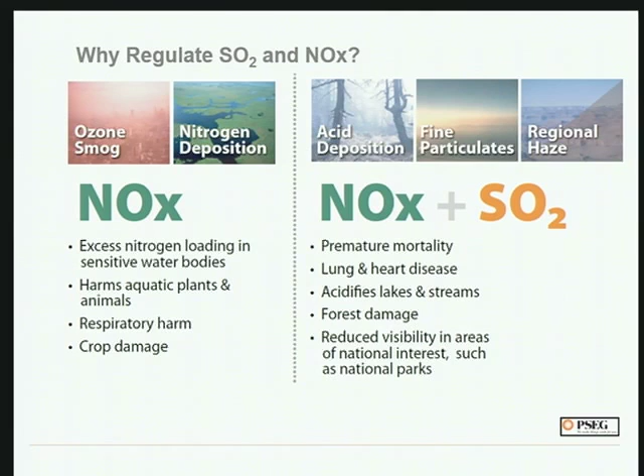Okay, so just to step back, the reason SO2 and NOx policy has so much uncertainty is because there's a lot of discretion, and it has to do with ambient air quality standards, achieving a certain concentration of ozone and PM in the atmosphere. So the focus naturally is less on one unit's individual stack emissions and more about achieving wide ambient air quality standards. In that, there's inherent flexibility for the use of trading programs, as well as looking at regional modeling and interstate transport issues. It's interesting - rather than mercury and some of the hazardous air pollutants, which have more severe human health impacts, SO2 and NOx have a little bit of flexibility inherent in them. That provides some element of flexibility, but also introduces uncertainty into how EPA will ultimately go about regulating the emissions.

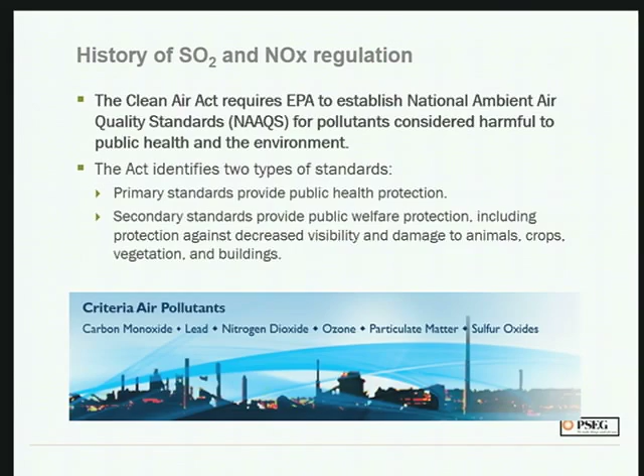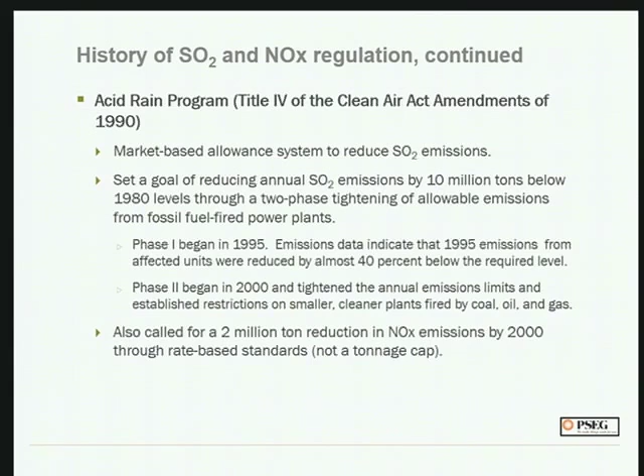So just to step back, the acid rain program - I think we're all well aware of that. It was the first emissions trading program, and it, in large degree, provides a framework for the 111D proposal on carbon. It was widely credited for achieving dramatic emissions reductions in a short period of time, cost effectively. So, love it or hate it, it has brought us to the point now where we're talking about carbon trading systems and even further tighter caps under SO2 and NOx. I'm not going to go into the details - these slides are here for you to read.

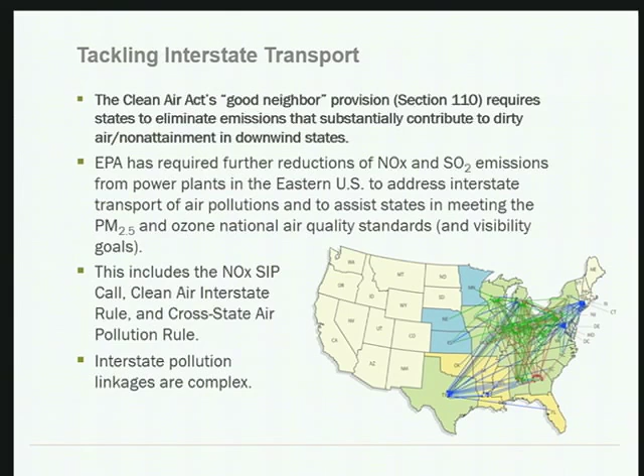The challenge with SO2 and NOx is, of course, interstate transport. It's very complex to understand the direct linkages between sources and receptors and how different units affect air quality among regions. We can spend days looking at EPA's modeling and all the nuances of the scientific understanding of how NOx and SO2 emissions get dispersed into the atmosphere. But I think it provides an interesting case study in how a regulator makes a determination as to an equitable distribution of costs and benefits across a region. Each state has its particular fuel mix and different cost structures with its generation fleet, yet there are regional air problems. It's a very interesting but difficult problem to solve: understanding where the emissions are affecting air quality, and how you distribute those costs and benefits.

And so that's the challenge. We're all living with it.

That's where we are. So in that effect, to realize emissions reductions and achieve the national ambient air quality standards, EPA has gone through a series of efforts, fits and starts, with the Clean Air Interstate Rule, CAIR, which the Bush administration first proposed. The D.C. Circuit, as we know, struck it down, then allowed it to remain in place while EPA developed an alternative. The courts determined that it was not stringent enough, so EPA was back to the drawing board. With that, they developed CSAPR, the proposal we all know about.

During that time, the allowance prices for SO2, which today range around $1, were for a large part in the early 1990s and 2000s around $100 to $200. They spiked to $400 to $500 per ton, went up to $1,600 per ton, and then collapsed in response to the D.C. Circuit ruling striking down CAIR, and now they've been fairly flat around $1 per ton. So a lot of variability, a lot of money at risk, which introduces complexity into long-term investment decision-making when you're banking on credits to make these retrofits.

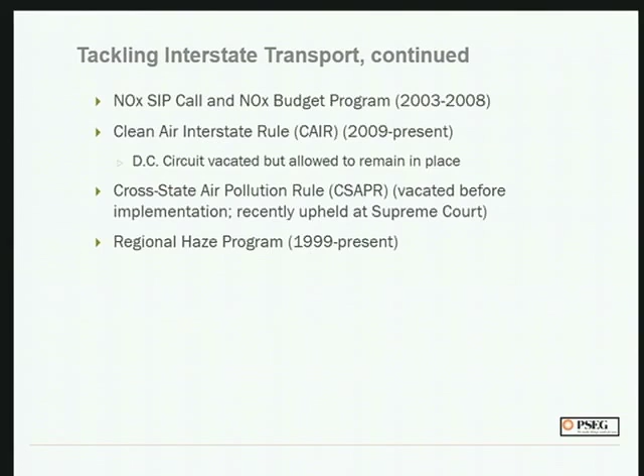And it's the same with NOx. The market has been very volatile in response to all these different regulatory proposals and Supreme Court decisions that have in turn struck down rules and then upheld certain provisions. So I think we're going to continue to see a volatile ride in the markets as the courts, EPA, and stakeholders figure out what eventually will be a program that everyone can live with.

I do want to point to the achievements that have been made. We see a dramatic reduction in SO2 and NOx emissions over the time period since 1980. The Clean Air Act was tasked with achieving reductions, and it largely succeeded. You see here a 67% reduction by 2012, while electricity generation went up.

Population has increased, GDP has increased, so this is a very good success story. A lot of people in this room, and others, have implemented back-end technology to reduce emissions, cost-effectively achieving reductions in a way that provided flexibility for some units to choose not to and pay for emissions credits, while other units made retrofits to comply.

So I think this is a good success story. I think it's important to note that we've made a lot of achievements.

We have a ways to go, but I also want to point your attention to vehicle miles traveled. It's a proxy for transport emissions from cars, trucks, and automobiles. We've become more mobile, moved out into the suburbs more, and done a lot more driving, and that in turn has increased a lot of the problem with ozone pollution. I'll touch upon that point at the end, but I think it's important to note that that's a problem that's there, and we continue to drive more while our electricity consumption has largely flattened out.

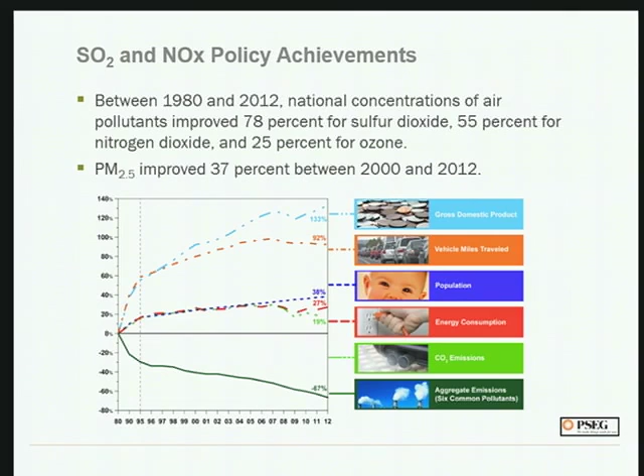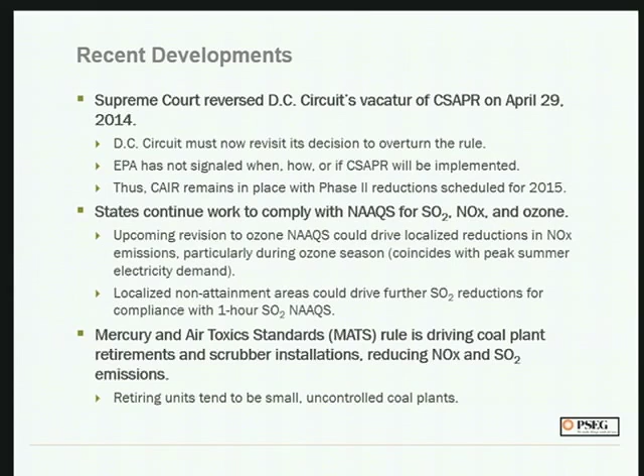Aside from certain areas where a 1-hour standard will challenge certain facilities, SO2 reductions have been or will be achieved. With NOx, though, it's a different standard, and I'll talk a little bit more about that in the future, but I just wanted to touch upon that right now.

So again, with the Supreme Court decision, the Supreme Court upheld EPA's authority to regulate and their discretion in determining neighboring states', or individual states', good neighbor responsibilities to lower their emissions to help other states achieve their air quality goals. And again, as I mentioned before, this has implications for 111D and the ability for EPA to go along with that plan.

And you know, while there will be challenges and a lot of court cases, and Quinn talked a lot about that yesterday, this has emboldened EPA and goes a long way to suggesting that a lot of their plan may be given discretion by the courts.

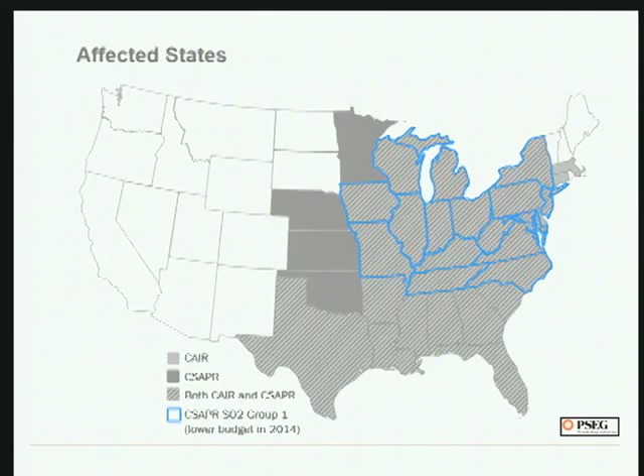I'll flip through the next two slides. The CSAPR regions are similar to CAIR with some extension.

Texas and Florida are key focal points because one thing the Supreme Court determined was that the threshold for requiring states to join these interstate transport regions should not be more significant than would bring them into the program. So Texas and Florida—EPA brought them under the program because their emissions contributed greater than 1% to the problem, but EPA was foreseeing reductions that would bring them greater than that obligation. And so the Supreme Court said EPA can't make them achieve reductions greater than their contribution.

So I think for Texas and Florida specifically, with the CSAPR rewrite, they may not need to comply as stringently as originally thought.

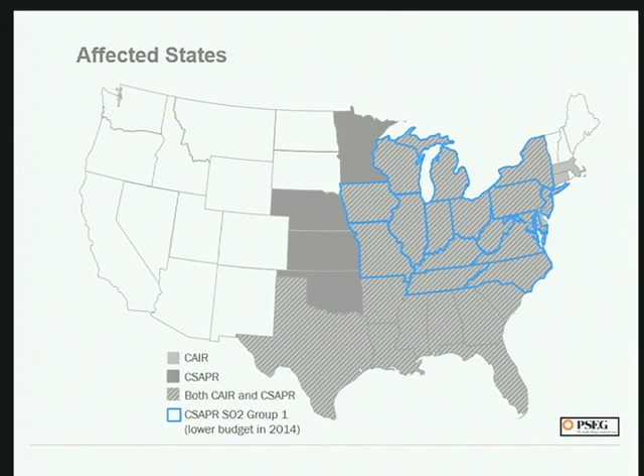So the focus right now, as far as CSAPR, is of course on a July 3rd briefing date with EPA. The DC Circuit has asked the parties to the litigation to provide briefs on how they think they should proceed. There were a lot of unanswered provisions or questions regarding challenges to the modeling approaches, and again, whether Texas and Florida should be included in the program, which the DC Circuit didn't originally address in their ruling that vacated the rule.

And so, as I speak here today, there's not a lot of certainty as to what will transpire in the future, but July 3rd will be a key date, and EPA has been close to the vest in indicating where they're thinking on CSAPR.

So it's an open guess as to what could happen, but in the meantime, CAIR remains in effect, and there are 2015 reductions scheduled to take effect that will, again, be less of a challenge for SO2, but for NOx will require some incremental reductions that may force some incremental installations of SCRs or SNCRs.

A critical question there is allowance prices, and whether or not states will move to impose a RACT requirement on individual units as their method to attain their ambient air quality standards. A lot of questions about what could transpire.

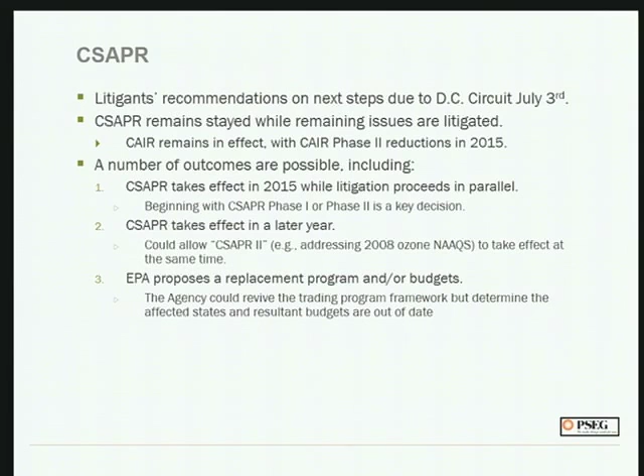And so that could take as much as 2 years to actually implement. So we could be talking implementation by January 2015 or as late as 2017. So a lot of uncertainty as to what course EPA will pursue. A lot of Wall Street analysts are speculating on that, and a lot of plants are in limbo, of course, complying with MATS. But this incremental requirement of an SCR or SNCR is a critical question that they will need to hold on and wait to see what EPA is thinking.

So with that, with SO2, there was a new 1 hour standard that EPA is working to implement. Again, SO2 reductions have occurred because of the changes in the industry and dispatch from coal to gas, as well as the controls that will be installed from MATS. SO2 as an overall cap looks to be in good shape. However, there are some local areas in non-attainment that will struggle to meet a new tighter 1 hour standard.

And this particularly, when you read Wall Street reports, they're very interested in learning which companies and which plants may be caught in that web. And the modeling is underway, and there's a lot of uncertainty and caution around what will happen there. So that's something to look to as far as EPA's solutions for that and whether or not that will be brought into their CSAPR rule.

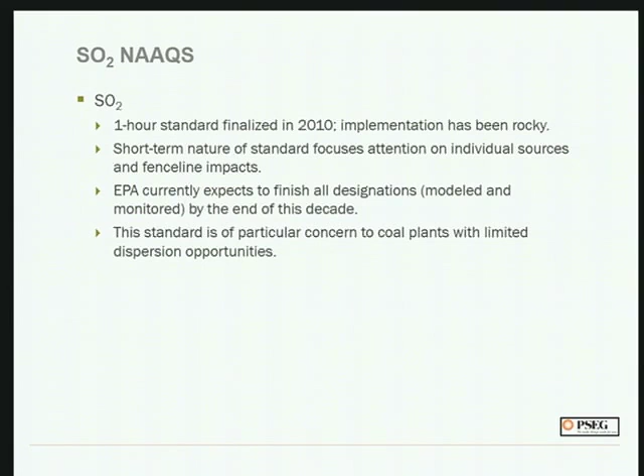As far as ozone, I mentioned that there's a tighter standard happening. The current standard that CSAPR was written to was 84 parts per billion to achieve. The 2008 standard is 75, and EPA is in the process of developing a new standard, which a recent court decision has required them to propose by December of 2014 and finalize by October of 2015.

So under this current administration, plans are for them to propose a new ambient air quality standard that could be between 60 and 70 parts per billion. The Clean Air Scientific Advisory Committee has recommended on the lower end of that, but the feasibility of achieving that standard may be called into question, and so we might see something towards more the upper end of the 60s.

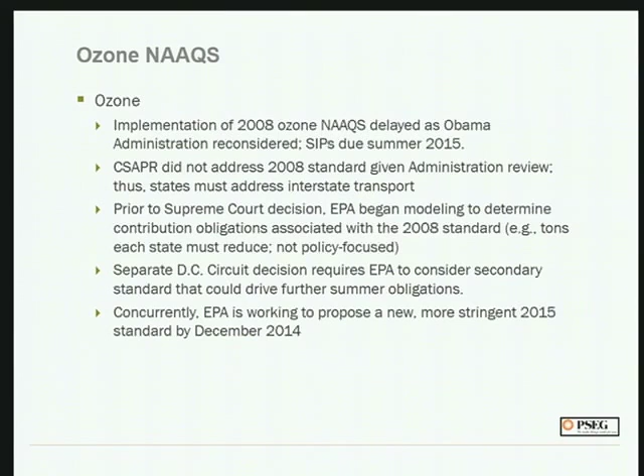But either way, that's a very strict standard that will be difficult for the industry to achieve, or will be costly, and that's something a lot of people have a lot of uncertainty about. Frankly, I don't think anyone can really realistically predict what will happen, but that's something that's key to watch. And I'll show a graph or an image to show this.

And so you look at the scale of reductions that might need to be achieved, and considering all the reductions that have and will continue to be made in the electric industry, you really scratch your head as to what can be achieved and at what cost. And I think that's the question that everyone's wrestling with. And that's the real, I think, bear in the room when you talk about what's next for SO2 and NOx.

Again, this is on a long horizon. The NAAQS will be finalized, the new standard would be finalized in October of '15. This is potentially under a transport rule or CSAPR Phase 3. So we're talking about implementation over 2019 to 2021. So it's far out there, but it's something to look forward to in the industry.

And it seems as if every plant will have to have at least an SNCR, if not an SCR, and so you really scratch your head as to see what costs the industry will have to bear to achieve that standard. Again, I want to ground us in where we are a little bit.

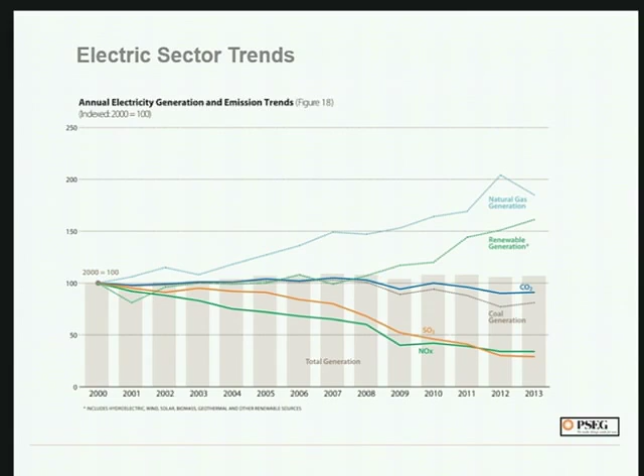I'll flip through here just to show you where the CSAPR reductions were in relation to the existing CAIR programs. You see our emissions are at or below the cap of the existing cap. Phase 2 CAIR, or CSAPR Phase 2, the 2014 rule would have required further reductions, but if you look at the last couple of years, with changes in the industry, it looks like for SO2 and MATS implementation will be below what CSAPR was originally proposing.

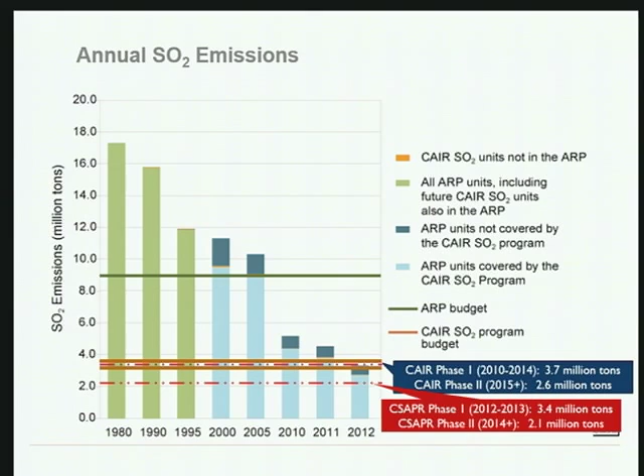Aside from the 1 hour standard where local regions or plants might be affected, there doesn't appear to be a major problem to achieving an SO2 or PM 2.5 National Ambient Air Quality Standard.

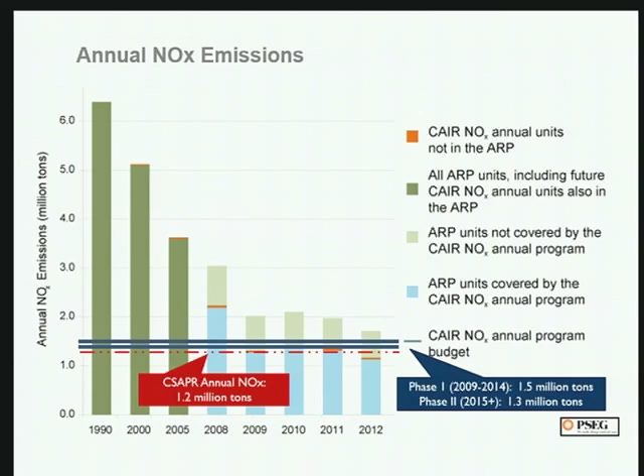All bets are off for the 2015 standard. So with that, I'd like to end with some general points here. First is that the policy climate remains uncertain.

I wish I could stand here today and tell you which plants will need to install what technology or close, but we're in a state of flux now, and I think we'll remain in a state of flux considering litigation and legal challenges for years to come.

So I don't think there will be any silver bullet solution. I think we're going to have to suffer through this period for time to come, and I guess we've been doing so for the last 10 plus years, so I guess there's nothing new there.

MATS will achieve many of or all of the SO2 reductions that were foreseen as required, aside from some certain local issues with the 1 hour standard. And broadly speaking, the electric sector has contributed many reductions, has been responsible for achieving a lot of reductions cost effectively.

And the question is, what's going to happen going forward? Are we going to revert back to more of a command and control strategy for RACT requirements and requiring every combined combustion turbine to have SNCRs? Or will we allow more trading and flexibility, understanding that different regions of the country will have different impacts and costs bearing on them?

It's a tough call, and I think that's something to look forward to from the EPA, whether or not they double down on trading systems or allow states to impose more command and control regulations to either close facilities or require state-of-the-art control technology.

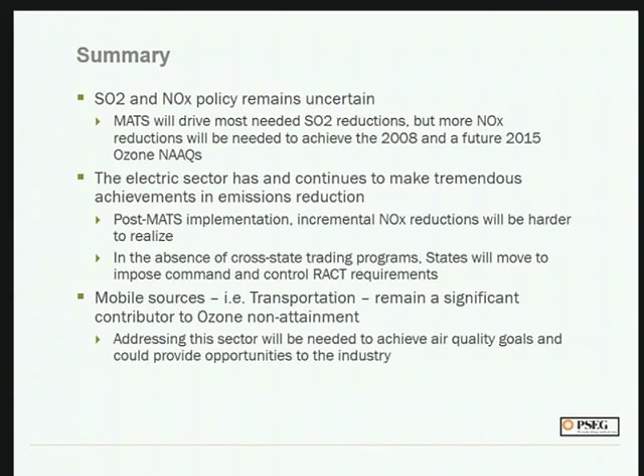Thank you. Seeing none, thank you.

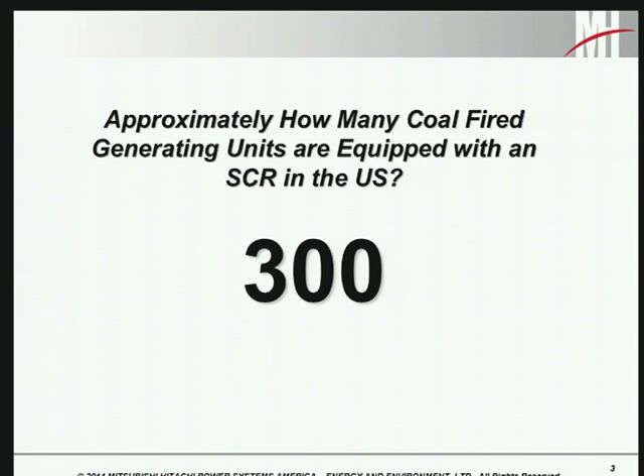Just real quick, anybody have any idea how many coal-fired units in the U.S. have SCRs? It's actually much lower than that on a percentage basis. There's probably somewhere over 1,000 units out there. Only 300 have SCRs currently. But whenever we look at those 300 units, the majority of those also have FGDs in place already.

Whenever you look at the oxidation of mercury that takes place across the SCR, most of those units are also able to capture that oxidized mercury in the downstream scrubber. So a lot of units out there are already getting great mercury co-benefits, we call it, from the SCR and FGD. So I'm just going to focus a little bit on how we can optimize that process that's already naturally occurring in our plants.

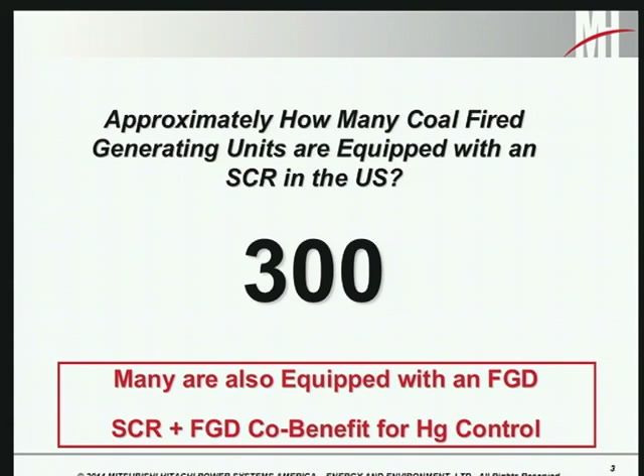Another quick question: of those 300 units equipped with SCRs, what do you think the average size of those units is? It's about 550 megawatts, the average size. So these are the larger units that are already equipped with SCRs.

Most of them have FGDs. They're probably the future of our coal-fired generation base in the U.S. So it makes a lot of sense to optimize and try to keep costs low on these units and comply with the rules. Oops, I'm bouncing ahead a little bit.

If we just look at the mercury removal process as we go across a typical coal-fired power plant, you can see the mercury comes into the plant in the coal in the elemental form. You get some mercury oxidation that takes place throughout the combustion process, but the majority of the oxidation actually takes place as the flue gas passes across the catalyst.

Oxidized mercury is much easier, much cheaper to take out, especially if your unit also has an FGD. So in theory, you can get nearly 100% of the oxidized mercury removed in an FGD as long as you've got good chemistry there and you're avoiding re-emission basically.

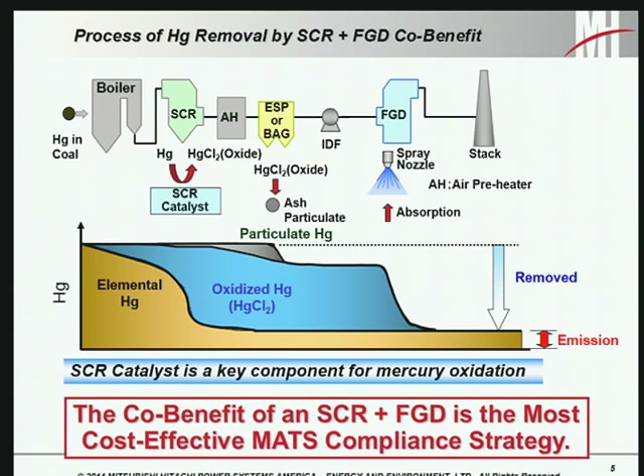So what are you left with at the stack? Well, you're left with basically anything you weren't able to oxidize. And that's why oxidation in the SCR is such an important factor.

Before I get too far ahead of myself, I just want to point out, this is a little play on words, we call it our TRAC record. I'm going to talk specifically about the Mitsubishi Hitachi TRAC type catalyst. It's an advanced catalyst for mercury oxidation.

We now have 19 layers commercially operating of this product, with 10 more layers planned to be installed over the next year. So this is a commercially available, commercially proven product, and it's being accepted by the industry as a plan and an approach to optimize your mercury emission reductions.

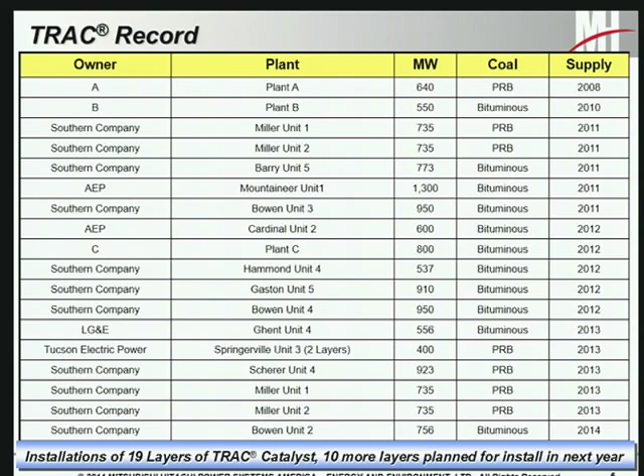So what are some of the main parameters that impact mercury oxidation in the SCR?

There are 5 main ones I'm going to talk about, starting with ammonia to NOx ratio. That's key—as you have more ammonia, it's typically harder to oxidize mercury. They go after the same active sites on the catalyst, and the catalyst was originally designed for NOx. That's the dominating reaction that wants to occur.

The catalyst, as it ages and deactivates, is no different than NOx. The mercury oxidation rate also deactivates and ages as the catalyst has been exposed to flue gas over time.

Halogen concentration is a big one—you've got to have halogens. It's the equivalent of ammonia in the NOx reduction reaction. You use the halogens that are present in the fuel, or added in the combustion process or downstream of that somewhere, and those are what combine with the mercury at the catalyst to oxidize it.

Temperature is another big one in the SCR. In general, the higher the temperature, the less mercury oxidation you're going to get. Lower temperatures are definitely much more prone to oxidizing mercury.

Another thing we're starting to learn more about—we're constantly learning about what impacts mercury oxidation in the SCR—is the elemental to total mercury ratio in the SCR. This has a huge impact. That last little bit of elemental mercury is much harder to get than when you have a very high ratio of elemental mercury.

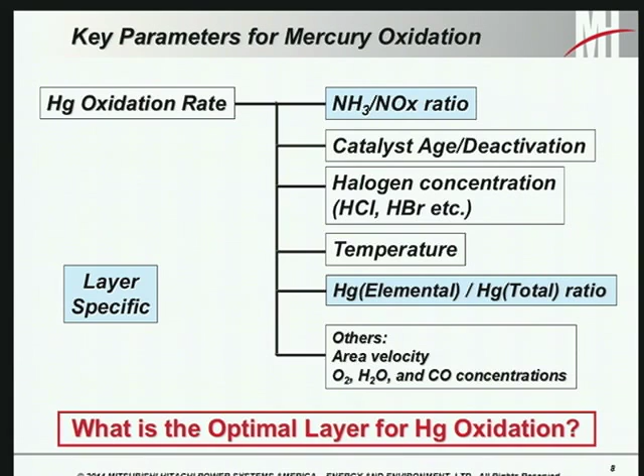The two shaded in blue there are the layer-specific parameters. As you go through your SCR, your ammonia to NOx ratio changes with every layer of catalyst, and you oxidize some mercury with every layer. So your ratio of elemental to total mercury is going to be different for every layer of catalyst. Those are the two I'm going to focus on mostly when we build this strategy and look at the best location for getting mercury oxidation in your SCR.

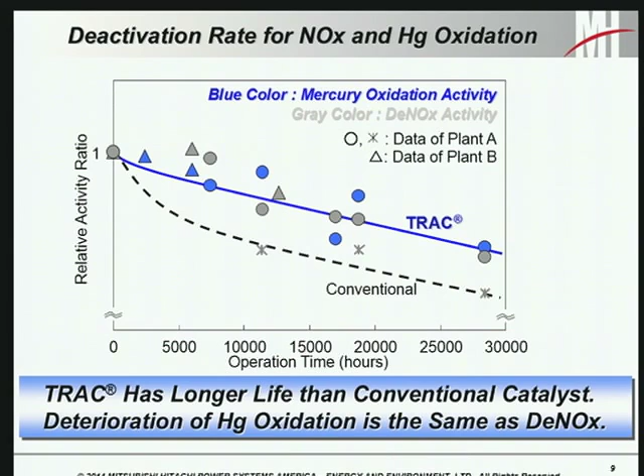Just real quick, I'll hit on the deactivation rate. In general, the deactivation rate of the mercury activity of catalyst is very much in line with the deactivation rate of the NOx reduction activity. So when you look at those two things, you can probably still work on a similar catalyst management plan as what you were using in the past.

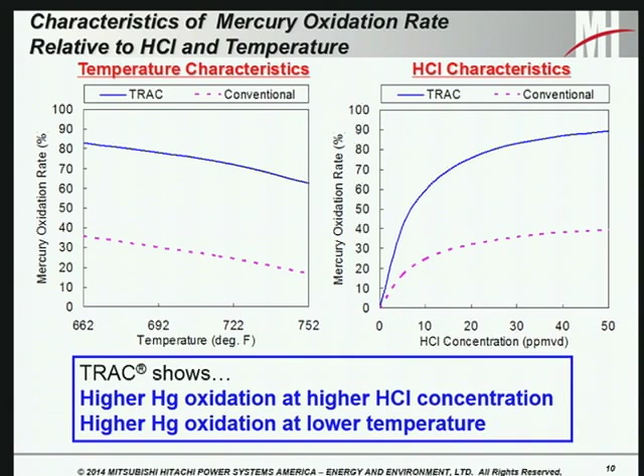Before I get into the layer specifics, I want to discuss the testing background and how some of these layer specifics were determined. We do mercury oxidation testing in a lab, small scale—similar to a bench scale test commonly used on catalyst. But we use a lab scale because we don't want to inject mercury in the bench; it causes all kinds of different problems that, quite honestly, I don't think anyone is doing yet. I know people are looking at it, but no one is doing it yet. So everyone testing in the lab with mercury right now is doing it on this small scale lab testing.

In the lab, you cannot completely replicate all the different parameters and things happening in the plant. So what we do is test in the lab and implement a set of correction procedures and correction curves to try and predict the performance in the plant based on that. Over the years, comparing field results to lab results, we've been able to dial in on this fairly well. But there's always still things you're learning, such as ash present in the field that you really can't account for, and what impact that has is very difficult to determine. So we're getting better every time we do a test, but we're still not 100% accurate in predicting field performance with a lab test.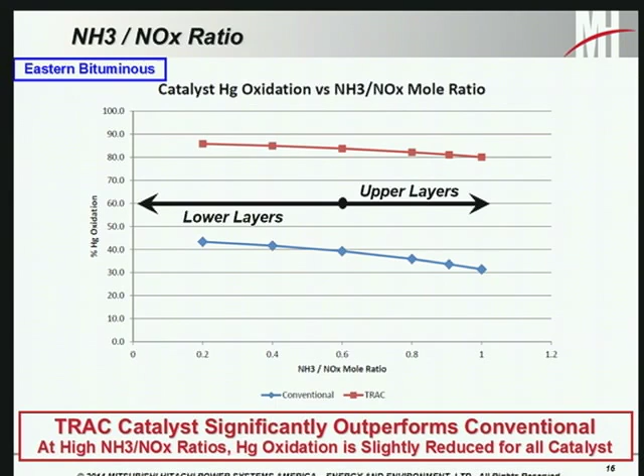You've got a lot more elemental mercury in your upper layers, so maybe it's better to put an advanced catalyst in your upper layer. But you get more benefit in the lower layers relative to a conventional layer. So where's the balancing act?

So what we did was we looked at 6 different cases. We looked at a base case where you use 4 layers, all conventional catalyst. Then we looked at 4 more cases where you put a layer of advanced catalyst in either the first, the second, the third, or the fourth layer. And then we looked at a 6th scenario where you used advanced catalyst in all layers.

As I said before, if you look at the bottom layer, there's really not much benefit to putting it in all four layers. So what impact does this have on actual mercury emissions at the stack? If you look at 83% mercury oxidation compared to 95% in your SCR, and assume a good capture efficiency in the FGD, you're actually looking at a 70% reduction in stack mercury emissions at this plant. So it doesn't seem like a lot when you're looking at percentages, but when you're looking at what actually makes it to the stack, it's a huge impact.

So what can we take away from this on the higher halogen fuel side? Really, an advanced catalyst installed anywhere is going to give you some benefit, but if you have your choice, it's probably better to install it in the lower layers.

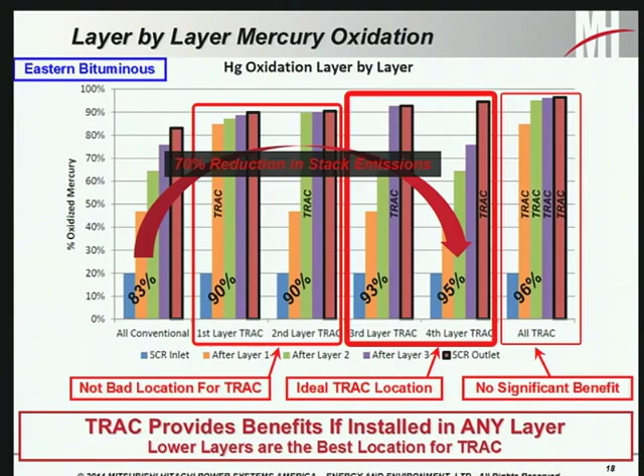So same thing for the lower halogen fuel. I'll run through this a little bit quicker. It's the same analysis, the only difference is the halogen concentration is much lower. Again, very similar relationship on the ammonia to NOx molar ratio. Upper layers, again, a little bit less compared to lower layers.

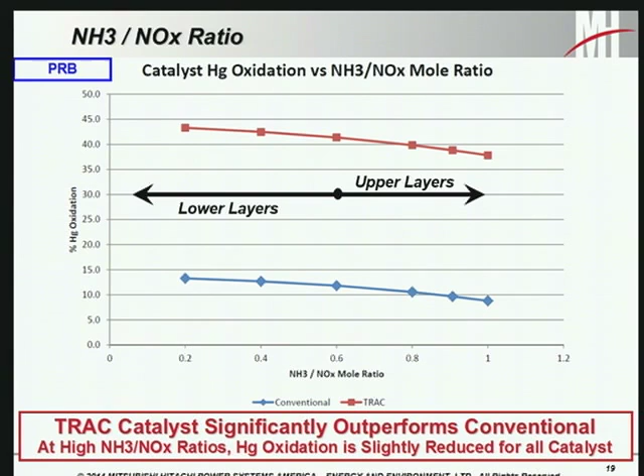Until we factor in the impact of the mercury speciation, the curve looks completely different after we implement the concept of different ratios of elemental to total mercury. Again, we look at our upper layers compared to our lower layers and the differences between the advanced catalyst. We're getting about 3 to 4 times more mercury oxidation activity in the upper layers and maybe 5 to 8 times more in the lower layers.

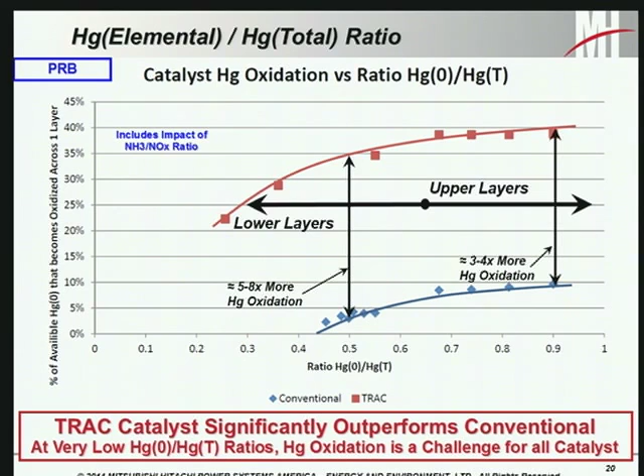So again, what does that mean? Well, we're looking at roughly 38% mercury oxidation with 4 layers of conventional catalyst, boosting it up to 51% when TRAC is in the first layer. When TRAC is in the second layer, it's boosted up to 53%, 56% in the third layer, and 59% in the fourth layer.

But you can go, if you get to all TRAC eventually, right? No one's probably going to go out and say, I just want to take all my current catalyst out and put in TRAC. But over the years, as you're replacing catalyst, maybe every couple years, eventually you could get to a point where you might have all TRAC. And we look at roughly 80% mercury oxidation at that point. So what can we say?

We can say actually going from 38 to 51%, that's a pretty good location for TRAC. That's not too bad at all. In the lower layers, it's even a better location.

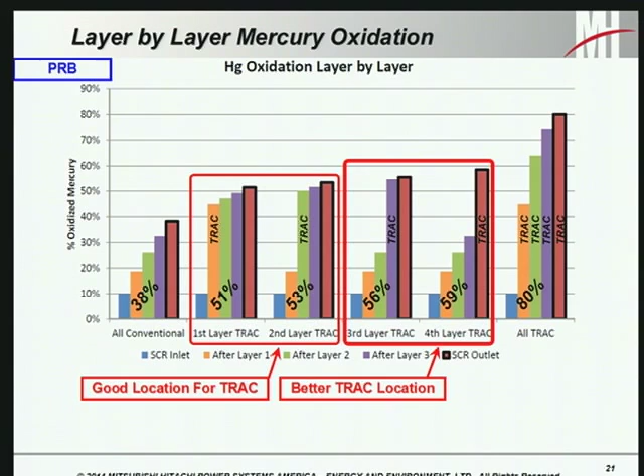But what's the ideal scenario here? The ideal scenario is installing TRAC eventually to a point where you get as much of it in the box as you can, because you're going to get a noticeable benefit every time you put another layer in.

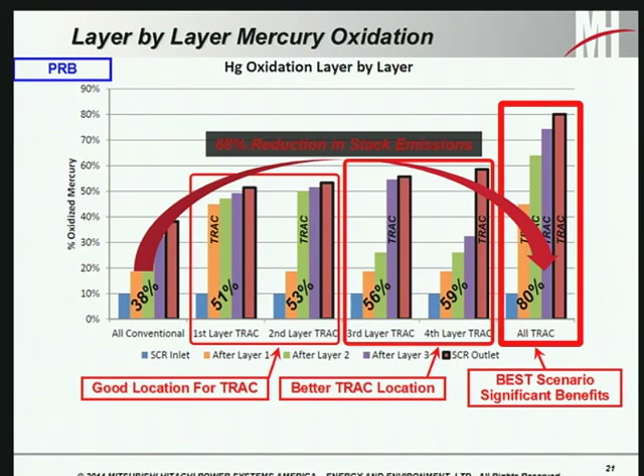So if we were to look at this again, what it means at the stack, if we went from 38% mercury oxidation in our SCR to 80% mercury oxidation in our SCR, we're looking at roughly a 68% reduction in the stack mercury emissions.

So in conclusion, what do we say for PRB? We can say really any layer is a good layer to install TRAC, and the more TRAC you have installed, the more benefit you're going to see on mercury.

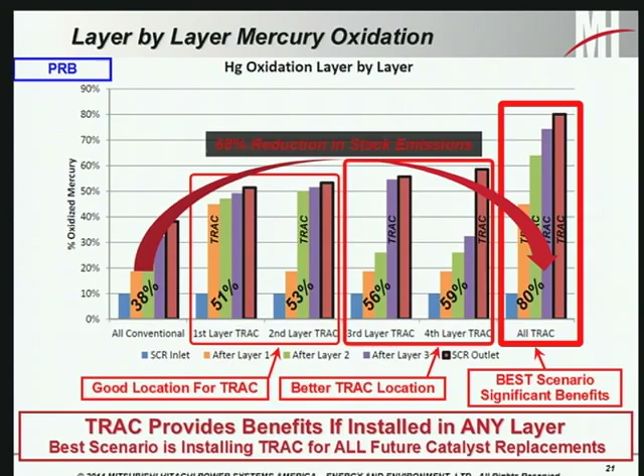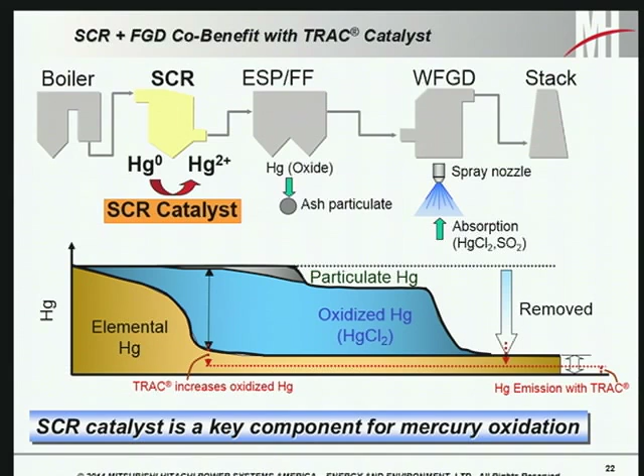This just talks in concept again, boosting your oxidized mercury percentage by a little bit always ends up in reduced emissions at the stack, assuming you're getting good removal efficiency across the FGD.

So a little bit on full-scale results now. We've done a couple tests. We haven't been able to do as much testing or as elaborate testing as we've been able to do in the lab, just because of the cost implications associated with doing the mercury testing on the full-scale side.

So this is one unit, bituminous fuel, so higher chlorine in the fuel. You can see the fuel range from about 43 to 120 ppm in the fuel.

This unit, they wanted to install the lower layer catalyst to be their advanced TRAC catalyst, so they actually moved this bottom layer up to the top, and then in the empty layer at the bottom installed TRAC. So they had the same three catalyst layers that they had before, and just basically added a layer of TRAC catalyst in the bottom.

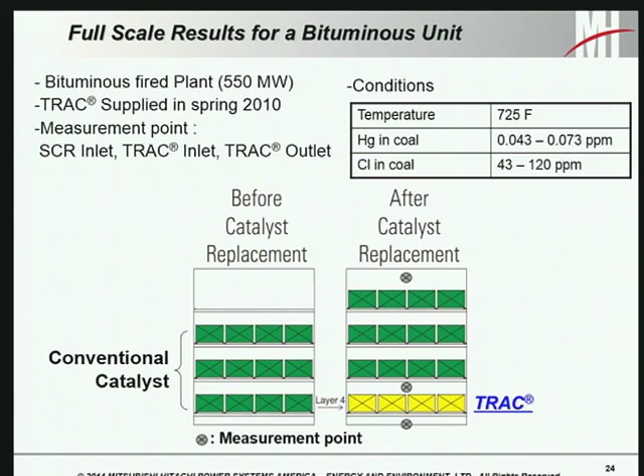And here's the results. We measured at the inlet of the SCR, after the first three layers, and then at the outlet of the SCR. At the inlet of the SCR, the average, we're in that 10 to 15% mercury oxidation range. After the first three layers, we're in that 40, 50% range. And then we're up close to 75% at the end.

So whenever you look at what was achieved and oxidized across one layer of the TRAC catalyst compared to three layers of a conventional catalyst, the actual activity ratio of TRAC was close to 5 times higher than the conventional. And that's in line with what we were able to predict in the lab tests that we did.

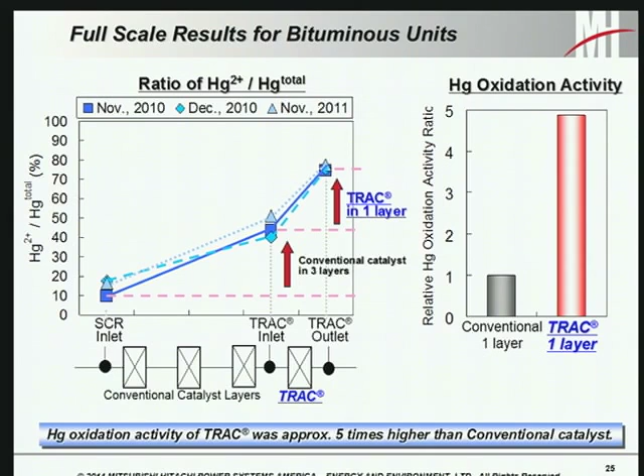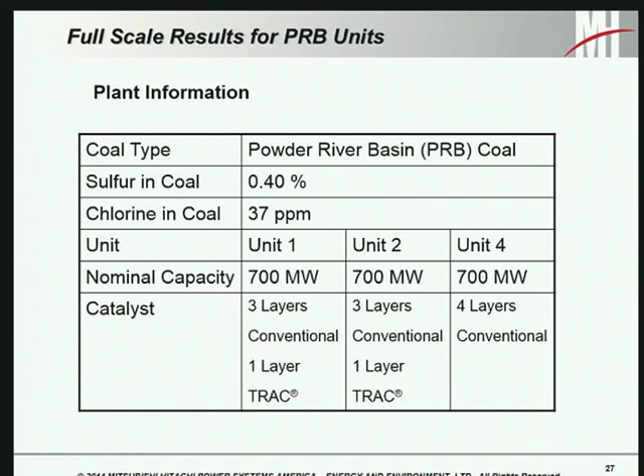Similar, this is now for a PRB unit. We actually have 3 units we studied in this. We've got Unit 1 and Unit 2 that have 3 layers of conventional catalyst, 1 layer of TRAC, and Unit 4, which has 4 layers of just conventional catalyst.

Oops, we skipped ahead. So if we look at that, here's the speciated mercury test results. At the SCR inlet on all 3 units, you're less than 5% mercury oxidation. On the 2 units that have TRAC, you're somewhere in that 40 to 50% mercury oxidation at the outlet of the air heater. And on the unit that didn't have TRAC, you're somewhere in that 10 to 15% range.

So again, you can see a significant benefit, about 3 times more mercury oxidation with that last layer being TRAC compared to not having the last layer be conventional catalyst.

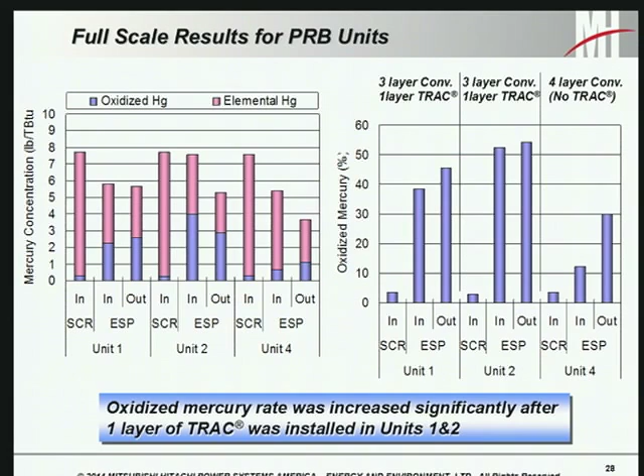So we took this and said, okay, so what does all this mean? It's good, we want to oxidize mercury, but financially and for compliance with MATS, what's the impact? I don't know how I'm doing on time, but I'll run through these numbers fairly quickly here.

We looked at really 4 cases. We looked at our eastern bituminous case with an ESP. We looked at an eastern bituminous case with a fabric filter. We looked at a PRB case with an ESP and a PRB case with a fabric filter. And we compared using catalyst, conventional versus an advanced catalyst in those units, to what you needed to do if you were going to trim with activated carbon to get you to compliance with MATS.

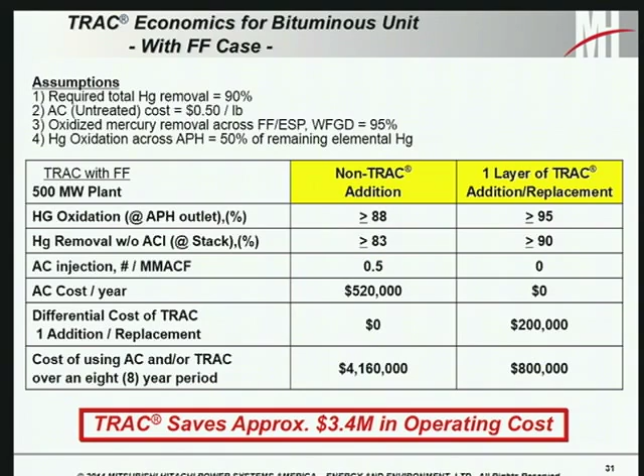We did the same thing with fabric filter. I'm not going to run through it in a lot of detail. The only difference is the activated carbon usage rates are much lower because you get a much better treatment time on the bags. So you can see instead of the 4 pounds, they're roughly at a half a pound per million actual cubic feet. But still over 8 years, roughly $4 million compared to about $1 million. So roughly $3 million in savings on a unit, even with the bag house.

So there's a lot to be said about implementing a practice with your SCR. A lot of people out there, a lot of people sitting in this room already have units with SCRs and FGDs, and optimizing your approach with those existing pieces of equipment without question is going to save money in the cost burden of complying with the MATS rule.

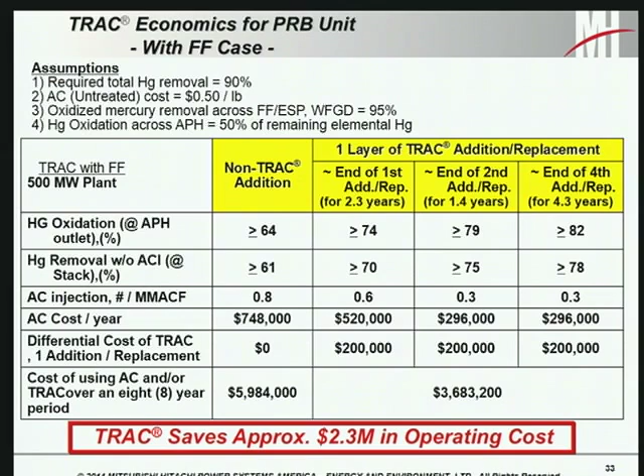So I believe that's all I have. If there's time for questions or anyone has any, I'd be happy to attempt to answer.

There is time for questions. So if there are any questions from the floor? One up here. Hold on, he'll give you a mic.

Thank you. So Kyle, can you talk a little bit about the SO2 to SO3 conversion rate of TRAC versus conventional, or the conventional low SO2 to SO3 catalysts? Yeah, that's a great question. The question is what happens to the conversion rate of SO2 to SO3 whenever you use the advanced TRAC catalyst.

And in general, the only difference with the TRAC catalyst is its ability to oxidize more mercury. So for the majority of applications and operating conditions that exist out there, we can get the same SO2 to SO3 conversion rate, same NOx performance activity with TRAC catalyst. The only difference is we get about 2 to 3 times higher activity ratio on the mercury side.

Any other questions? All right, thanks for your time, guys.